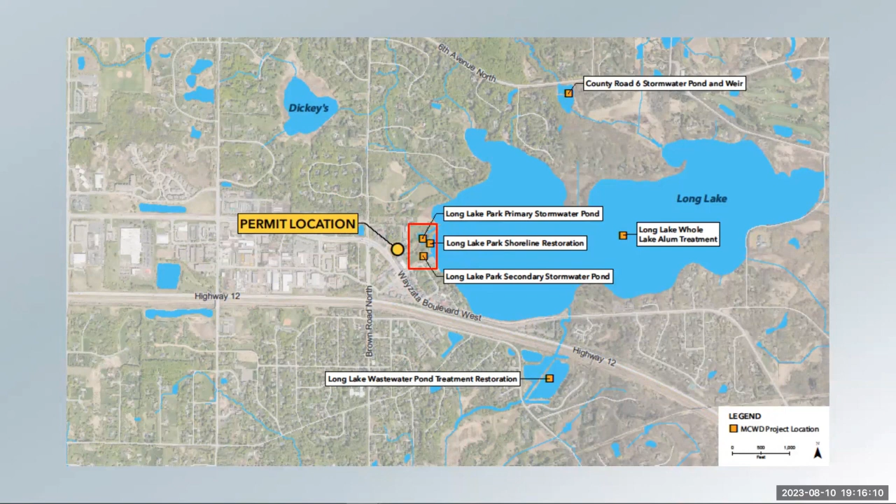This map shows a closer aerial view of the local area and how water moves through the channel that runs along the project site. Upstream of the project area is a drainage system or route along Highway 12. From this area, the water moves north under Highway 12, under Brown Road North, and under Wayzata Boulevard West through a system of culverts. From Wayzata Boulevard West, the channel runs through the project site and into the stormwater basin system before discharging into Long Lake.

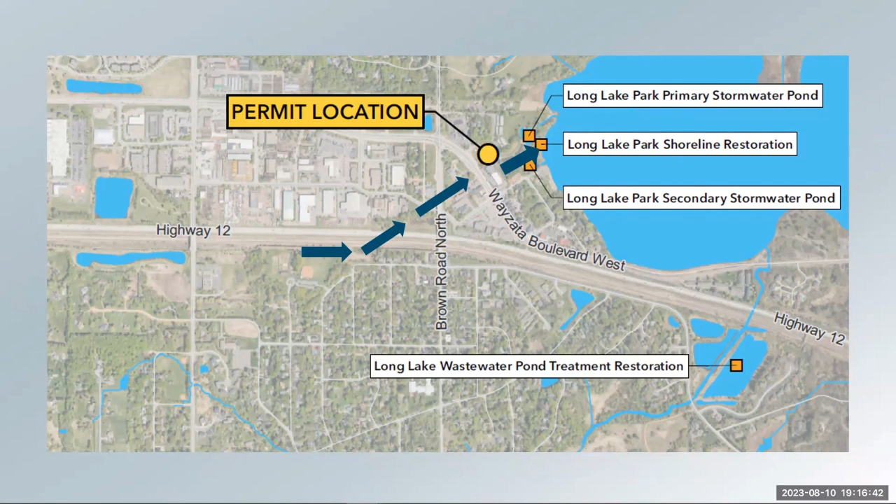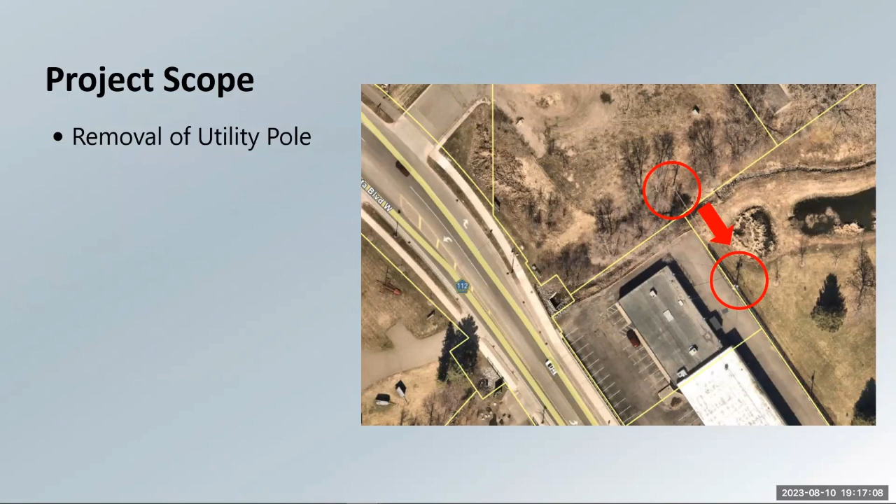The applicant was previously leasing a utility pole owned by Xcel Energy that has been removed. The existing internet fiber cable had been attached to Xcel Energy's pole and was connected aerially to the existing utility pole on the north side of the building at 1916 Wayzata Boulevard West. Because the utility pole was removed, the fiber cable is currently lying exposed on the ground and over the channel.

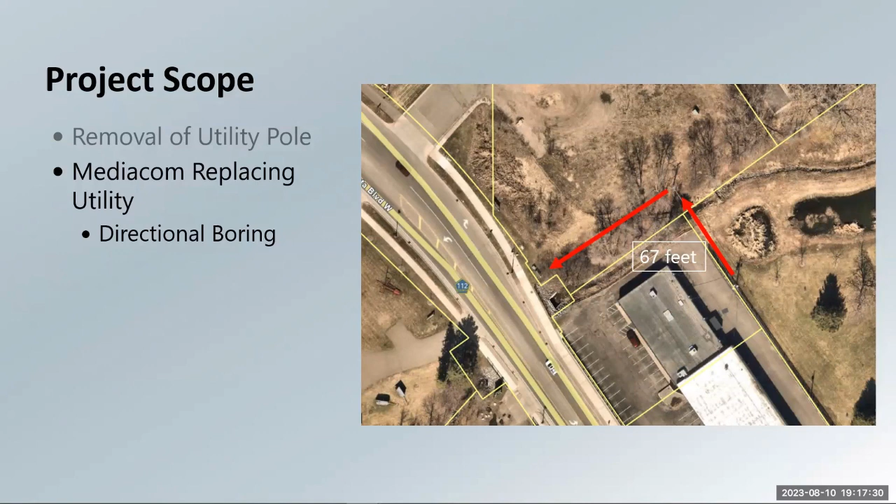Therefore, the applicant proposes to install 290 linear feet of 1.5-inch PVC interduct within the same utility easement using directional boring to replace the fiber cable that is currently lying on the ground. 67 feet of this duct will be located beneath the channel and will connect the fiber cable to the existing utility pole.

Now that we've looked at the project's location within the district and the proposed work at the site, I will review the district rules triggered and how the proposed project meets their requirements.

For the rule analysis, staff have reviewed the permit application and determined that the proposed project triggers the district's water body crossings and structures rule. The permit has been reviewed in accordance with the criterion of the rule.

The water body crossings and structures rule is applicable to projects that propose to place a road, utility, bridge, boardwalk, or associated structure in contact with the bed or bank of a water body. This includes horizontal or directional drilling and the installation or replacement of a pipe or culvert.

This project triggers the water body crossings and structures rule because a utility is to be installed underneath a channel with defined banks, thus meeting the definition of a district watercourse.

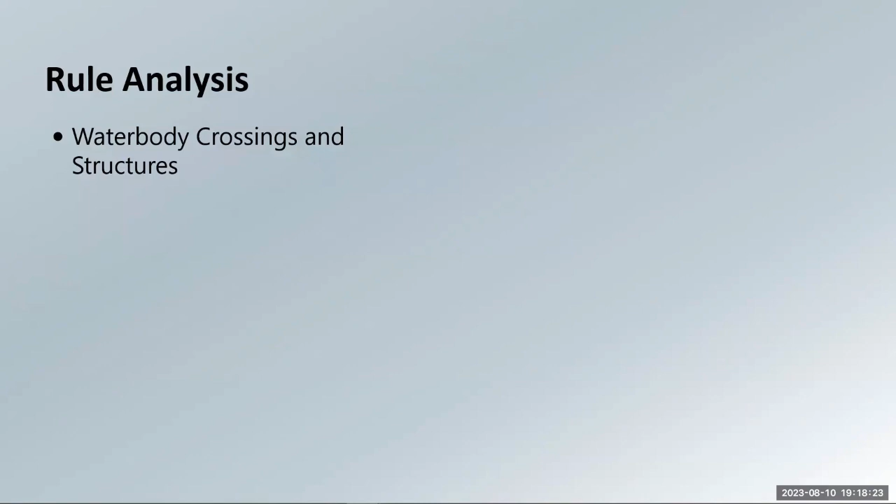The applicant's proposed work will not affect water quality, hydraulic capacity, or wildlife passage capabilities, as the applicant is not proposing to work within or disturb the bed or banks of the channel.

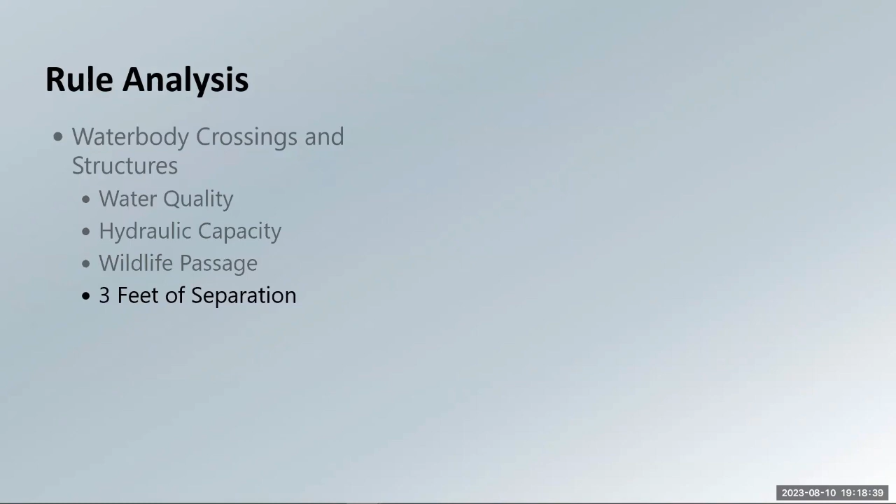The applicant has provided at least 3 feet of separation between the bottom of the channel bed and the top of the duct in their plans, and the applicant's proposed work meets the requirements and criteria of the water body crossings and structures rule, with the exception of one requirement, section 3G.

Based on review of the submitted plans, the applicant is not able to meet the required 100-foot setback from water bodies for one directional drilling bore pit.

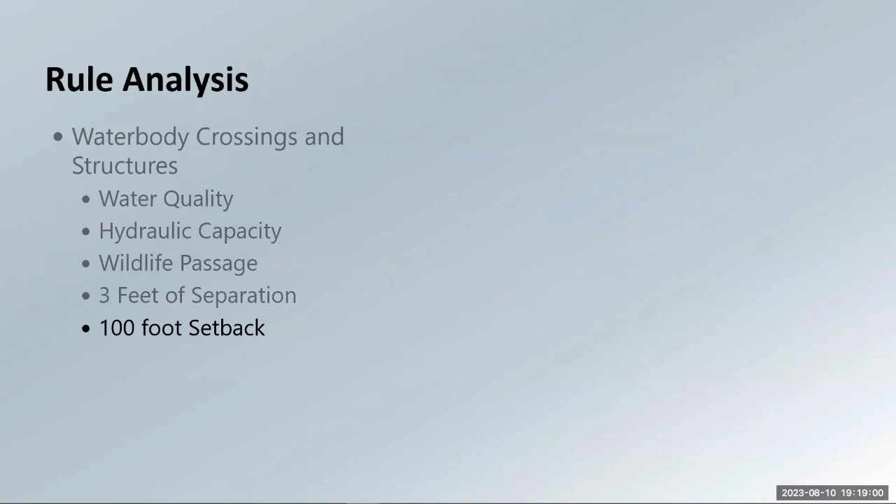The applicant has requested the board consider granting a variance to the water body crossings and structures rule, section 3G, which requires a minimum 100-foot setback from water bodies for directional drilling holes. The purpose of this requirement is to place bore pits far away from any watercourse banks to prevent erosion, sedimentation, and impact from the fluid used to route the directional drilling pipes, ducts, or lines.

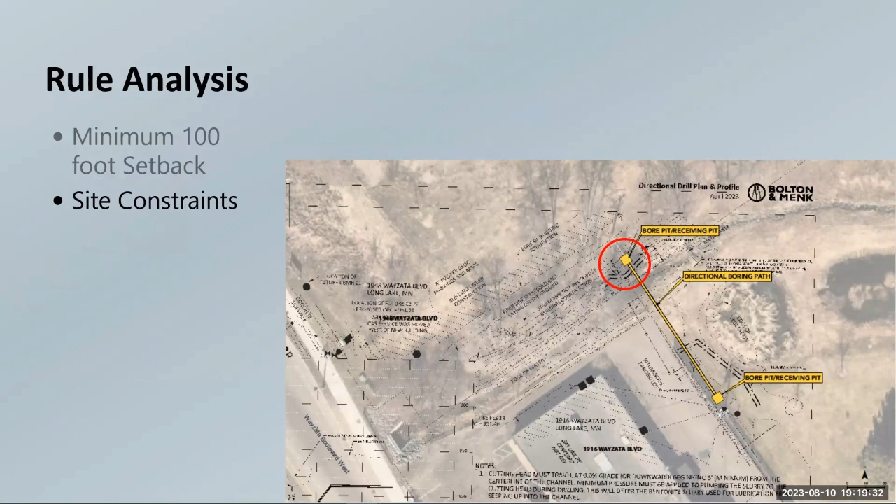The bore pit located west of the channel cannot be moved closer to the 100-foot setback requirement due to spatial constraints.

These constraints are due to existing utility infrastructure located on the property for the applicant, which are the existing handhole or at-grade vault located at Wayzata Boulevard West, here in the red circle, and the existing utility pole located north of the building at 1916 Wayzata Boulevard West, both of which the fiber cable needs to connect to.

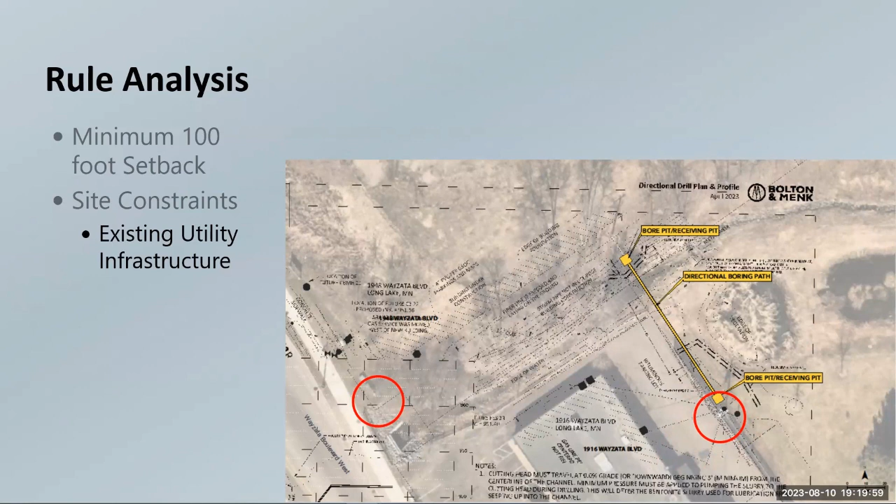The other site constraint is a senior living apartment building being constructed at the property of 1948 Wayzata Boulevard West. If you aren't aware of this, this is the Zvago Long Lake senior apartment building.

The applicant is proposing to install the fiber cable within existing utility easements, which will require a bore pit to be located 33 feet from the channel.

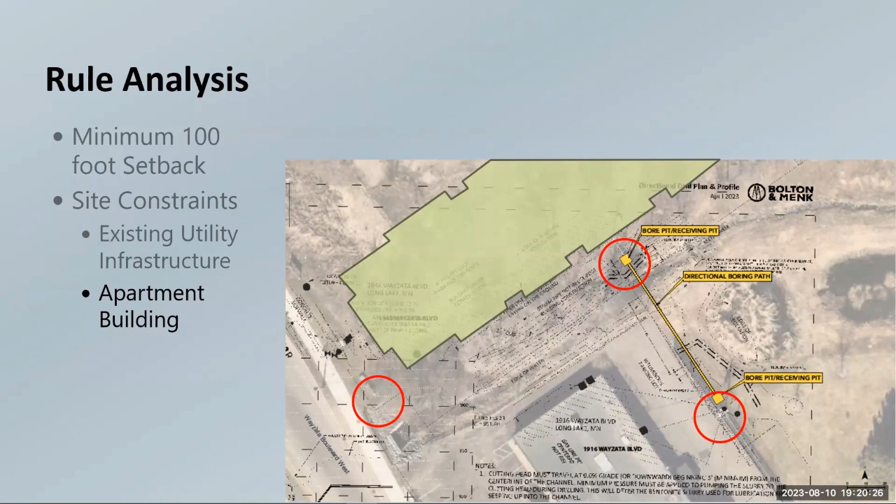The applicant has proposed to install redundant silt fence as erosion and sediment control measures to mitigate any risk of erosion or sediment movement from the proposed bore pit.

We've now reviewed the geography of the project area as well as the district rules that are triggered. In this next section of the presentation, I will be reviewing the applicant's variance request.

The variance and exceptions rule allows the Board of Managers to hear requests for variances from strict compliance with provisions of the district rules if the board determines that the request meets 5 criteria. Each variance criterion is analyzed in the following slides.

The first criterion asks the applicant to prove that due to special conditions inherent to the property, strict compliance with the rules results in hardship.

The applicant states that the position and alignment of the western proposed bore pit site represents a special condition, and moving the bore pit to the required 100-foot setback would cause undue hardship.

The fiber cable was previously connected aerially from the existing utility handhole or at-grade vault at Wayzata Boulevard, again located in this area, to the utility pole north of the building at 1916 Wayzata Boulevard West by an Xcel Energy owned utility pole located at the property of 1948 Wayzata Boulevard West, where this proposed bore pit is.

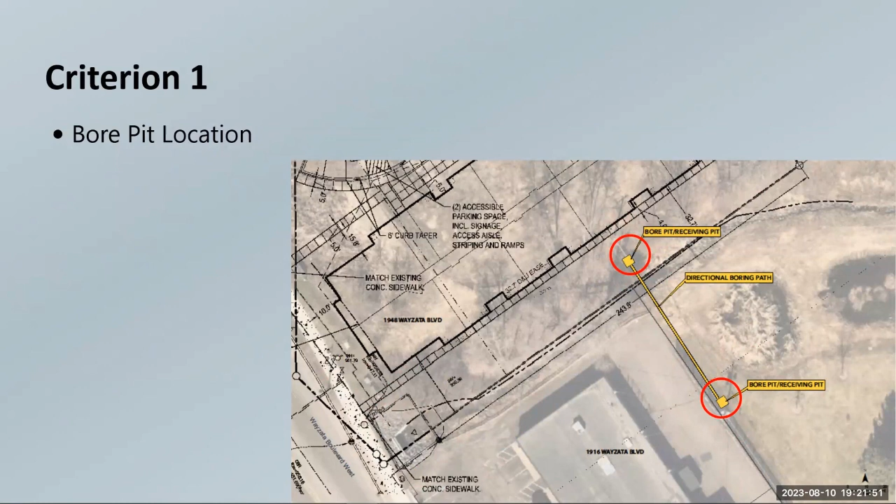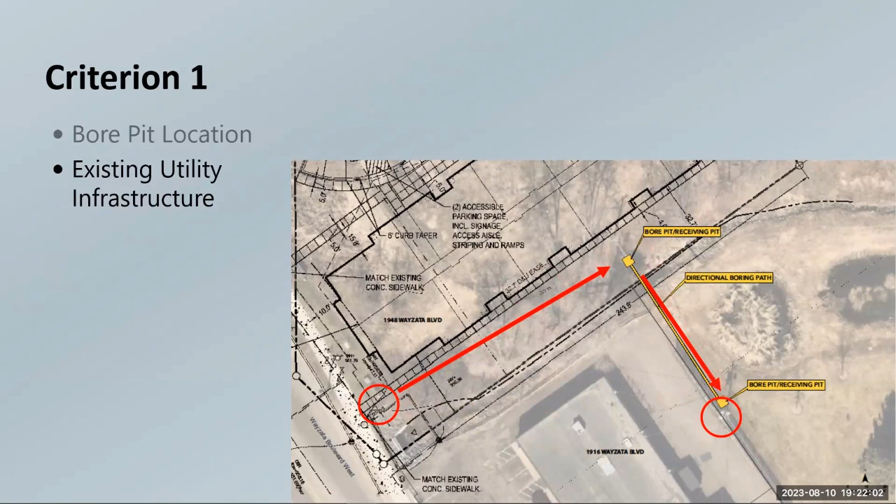A senior living apartment building is being constructed on the property of 1948 Wayzata Boulevard West. The building footprint restricts the distance of the proposed bore pit on the west side of the channel.

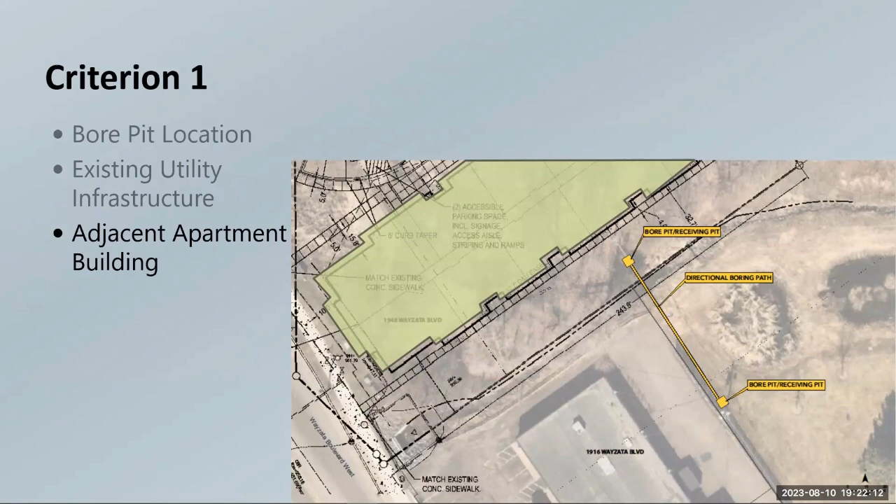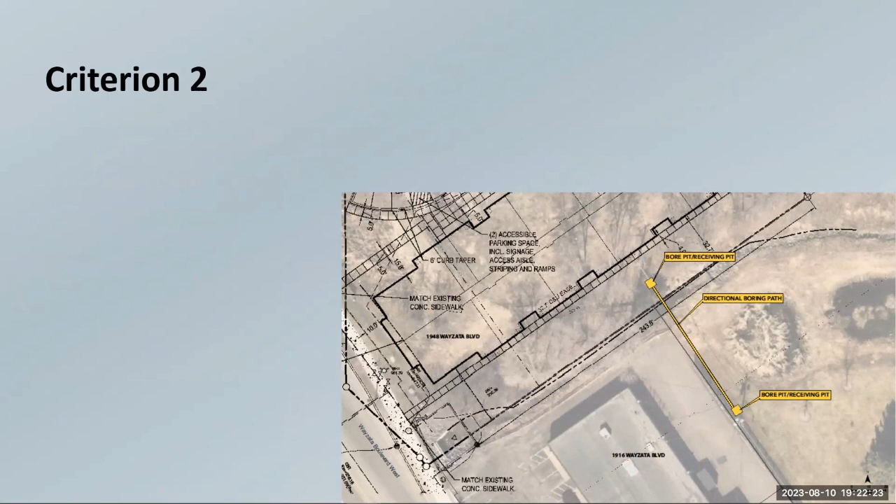The second criterion asks the applicant to prove that the hardship was not created by the landowner or applicant themselves. The applicant proposed to install the fiber cable underground because a utility pole they were leasing from Xcel Energy was removed. This removal was out of the applicant's control. The applicant is proposing to install the fiber cable using directional boring, with entrance and exit holes on either side of the channel.

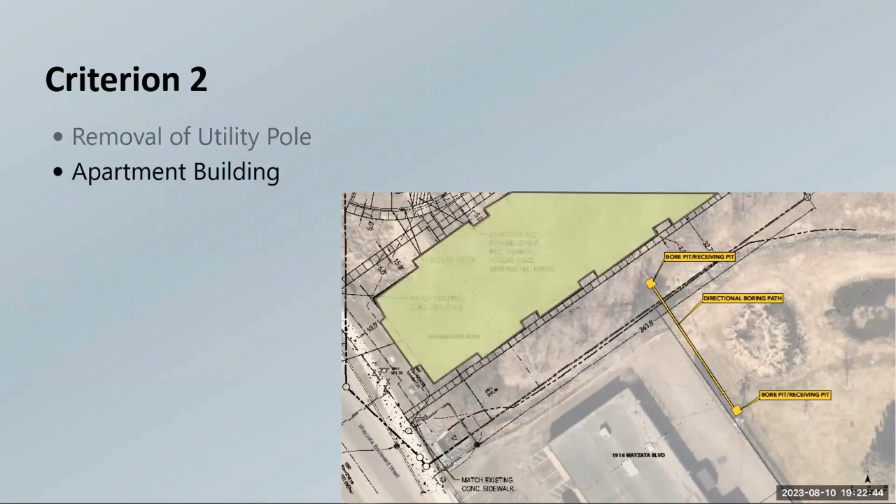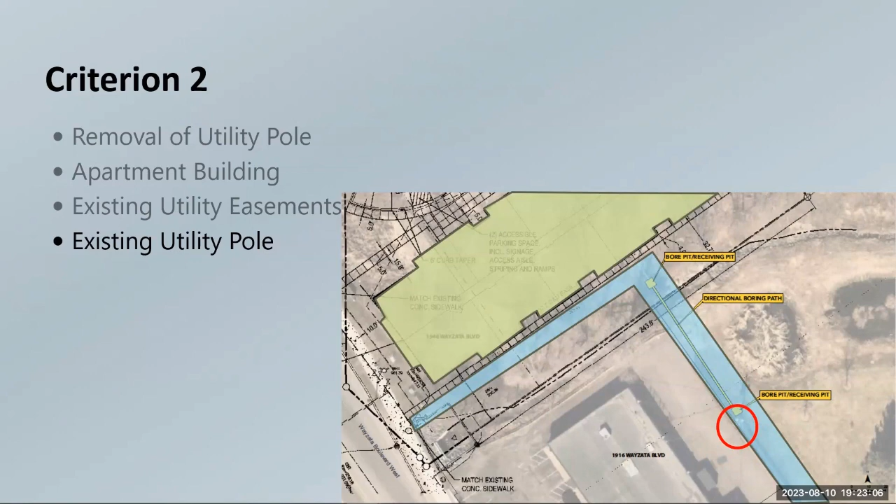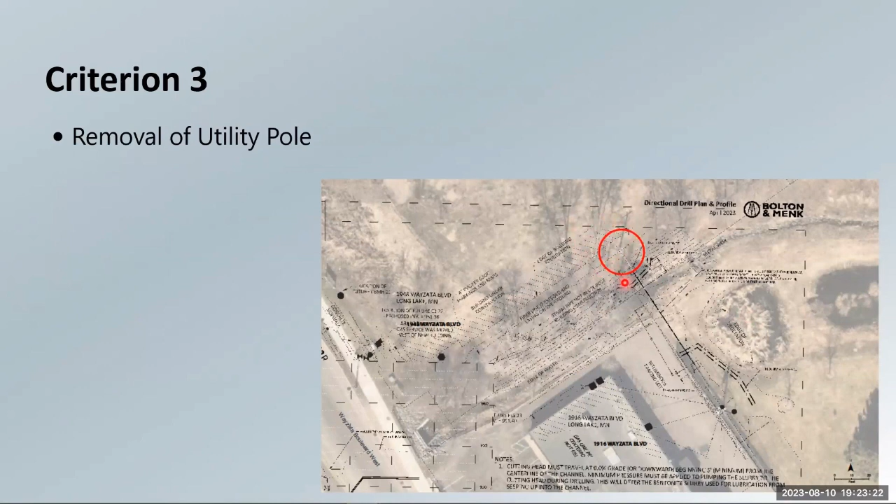The third criterion asks the applicant to prove that granting the variance will not just serve as a convenience to them and the project. Because a utility pole that the applicant was leasing was removed, the existing fiber cable is now laying on the ground and across the channel, from the existing handhole or at-grade vault to where the utility pole was located. The need to find a sustainable location for this utility is not merely a convenience to the applicant.

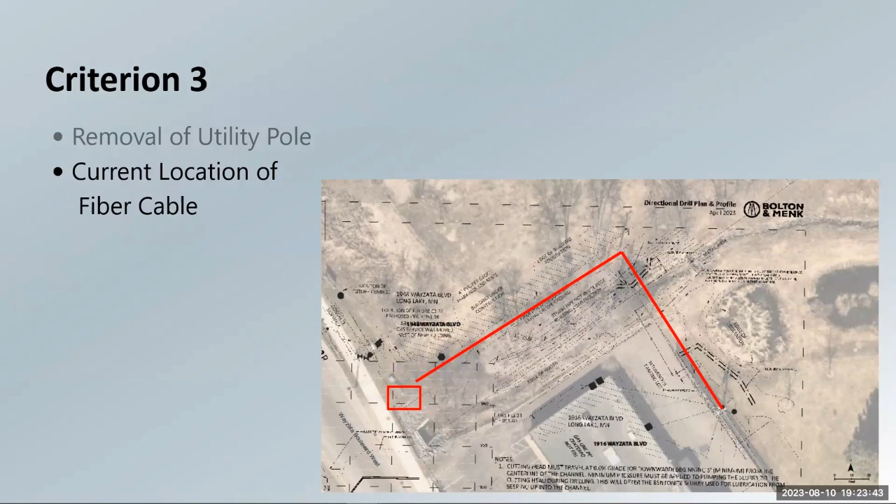The fourth criterion asks the applicant to prove that there is no feasible or prudent alternative to the activity requiring the variance. The applicant has explored alternative options for this location.

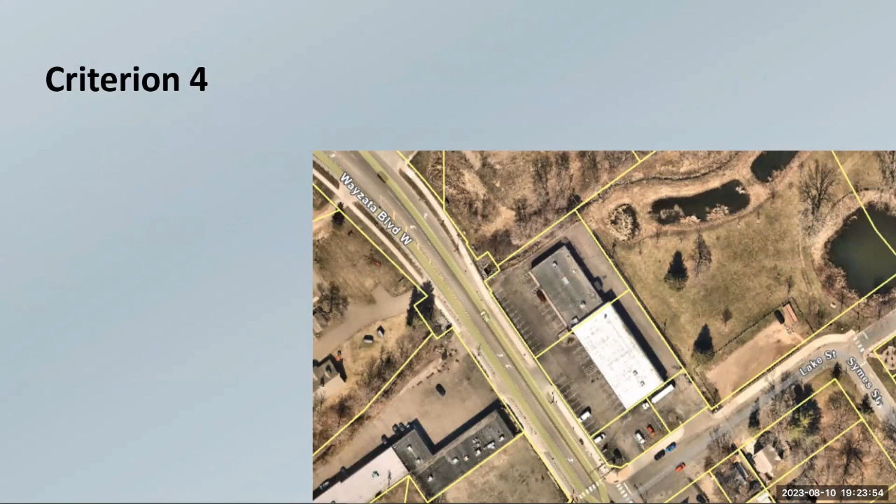The first alternative option is to construct a utility pole on the west side of the channel to have the fiber cable cross aerially. Constructing a utility pole would have potential channel impacts if the pole were to fall into the stream or become damaged, and would require ongoing future maintenance. In addition, utility poles require minimum setback distances from building structures.

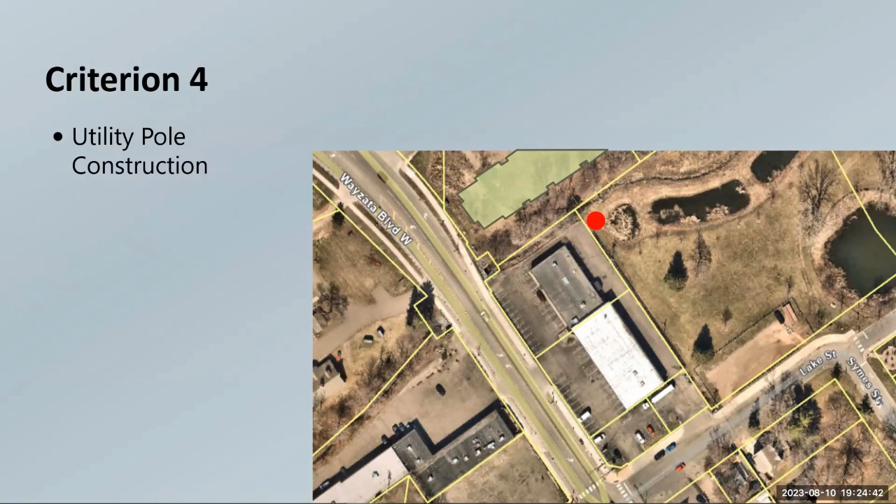To construct or install a utility pole on the west side of the channel within the existing utility easement that is set back far enough from the apartment building and not within the channel would place the pole on the east side of the channel. In addition, the applicant leases utility poles and does not put up their own structures. If an existing utility pole is an option, the applicant will pay a rental fee to lease the pole. If there are limited or no utility poles available, the applicant will install their infrastructure underground.

The second alternative is to leave the fiber cable at ground level crossing the stream. This would leave the cable at risk of being damaged or potentially falling into the channel.

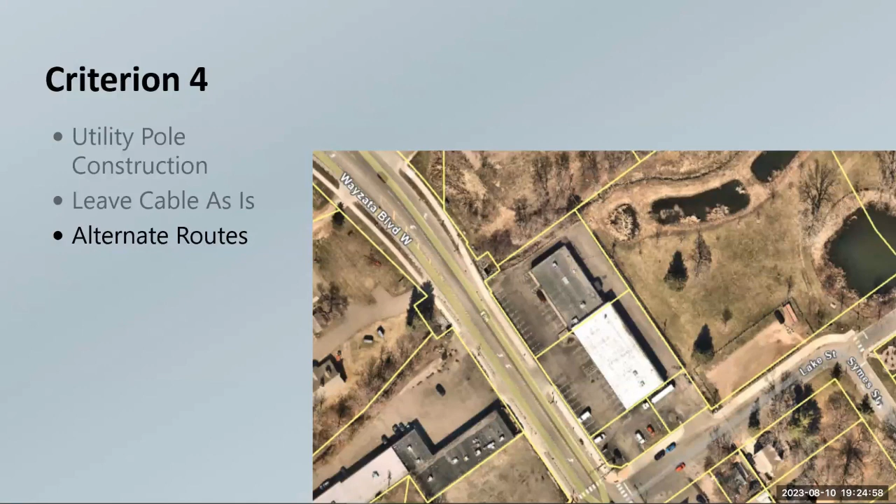The third alternative explored is to alternately route the fiber cable and tie it into the existing utility pole from the south side of the building while still avoiding crossing the channel. As shown in the alternative route maps included in the board packet, these routes would require additional linear feet of cable and excavation or work areas in order to route the cable and duct away from the channel and avoid crossing it while still connecting it to the south side of the building.

In addition, the applicant would need to avoid excavating within or along Wayzata Boulevard West, as it would be contrary to the special provisions condition listed on the applicant's right-of-way utility permit from Hennepin County. Because Wayzata Boulevard West was reconstructed within the last five years, no excavations or land disturbance are allowed within the roadway, curb and gutter, or sidewalk areas.

If the applicant were to route the fiber cable on the west and south side of the building, still within close proximity, the applicant would still need to cross the channel.

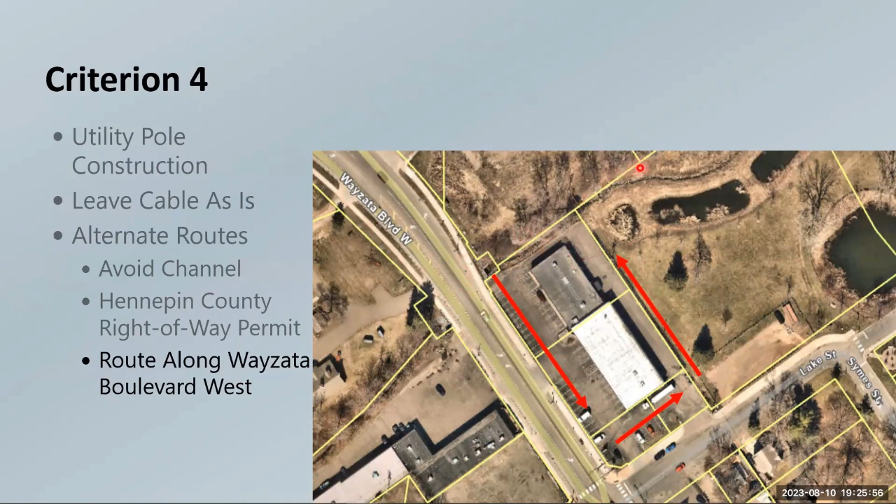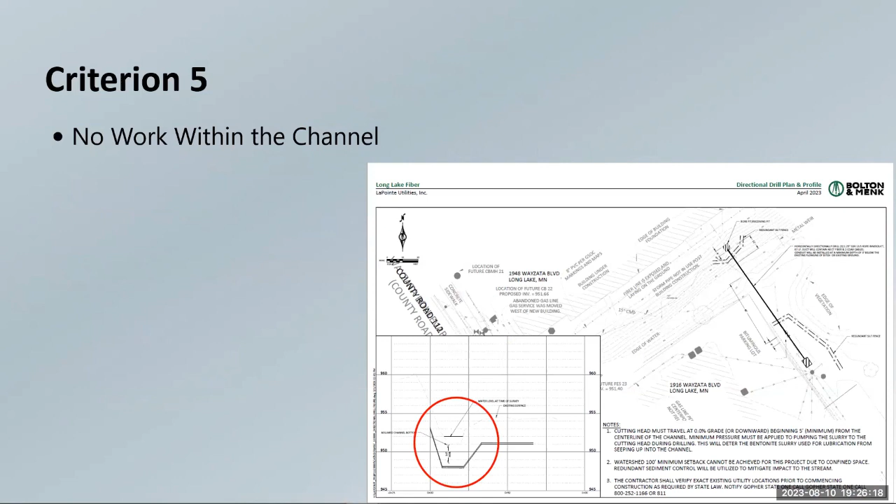The fifth criterion asks the applicant to prove that granting the variance will not be contrary to the intent of the water body crossings and structures rule. The applicant has cited that no work will be done within the bed or bank of the channel, and a clearance of 3 feet beneath the bed of the channel has been cited on the applicant's work plans. The ecological integrity of the channel will not change from existing to post-construction conditions.

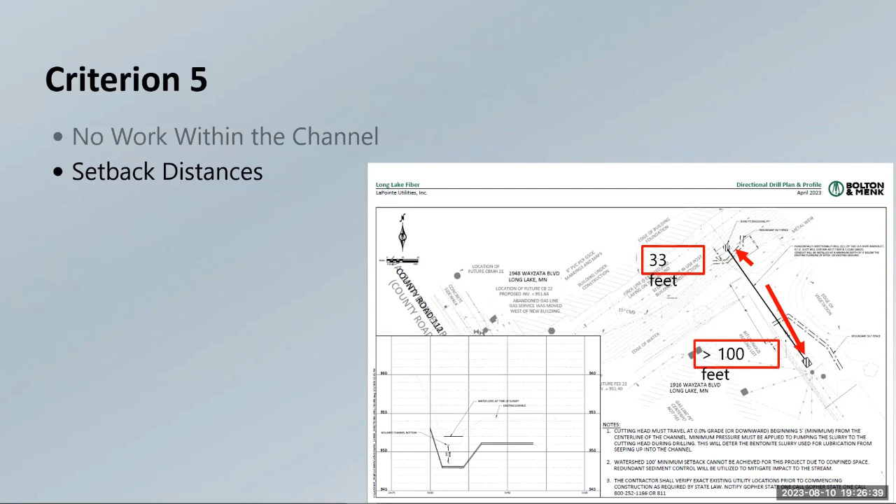Both bore pits will be set back from the channel top of bank. The proposed bore pit located east of the channel will be more than 100 feet from the channel banks, and the proposed bore pit located west of the channel will be approximately 33 feet from the channel top of bank. Neither bore pit will be placed within the bed or banks of the channel.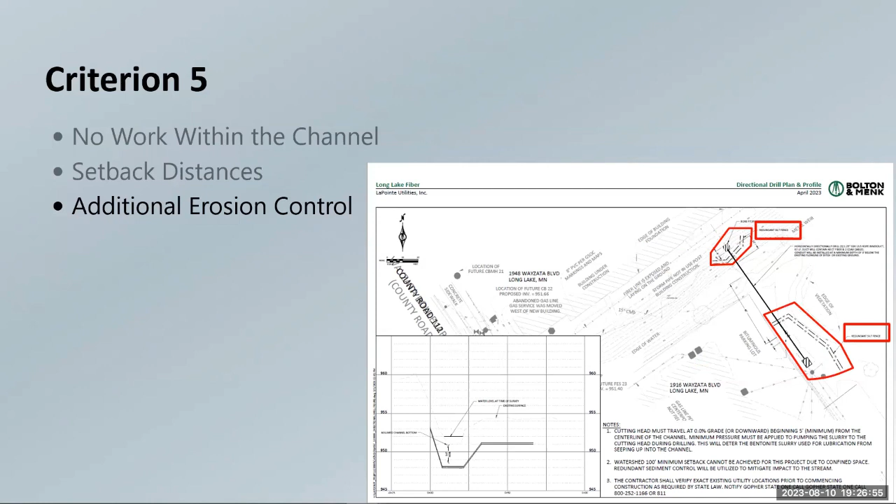Redundant silt fence has been sited on the applicant's work plans and will be used at both bore pit locations on either side of the channel. The use of multiple erosion control best management practices will minimize any construction impact to the channel and prevent any erosion or sediment movement at the bore pit locations.

In summary, the applicant has applied for Minnehaha Creek Watershed District permit for water body crossings and structures and a variance to provide a required minimum setback of 100 feet for one bore pit location. Staff is recommending approval contingent on the board's approval of the variance because staff found all other requirements to have been met. Staff finds the variance arguments to be sound, accurate, and justified, and on that basis, pass on the variance to the board for their judgment and review.

Thank you, Chair Olson and Board of Managers, for listening to this briefing on permit 23-71 and the applicant's variance request. If anyone has any questions or comments, I'm happy to answer them now. Before we do that, I'd like to know, is there a motion to approve permit 23-71?

Okay, well, how about it? All right, we'll have Manager Hijmati.

General practice is for the board to consider action on the variance first. I believe legal counsel is just confirming the same thing. So we will take a motion on the variance first from Manager Hijmati. Second by Manager Maxwell.

All right, any discussion on the variance? I had one question. You touched on it a little bit, but I understand Xcel took the utility pole down, but why not erect their own pole in the same spot?

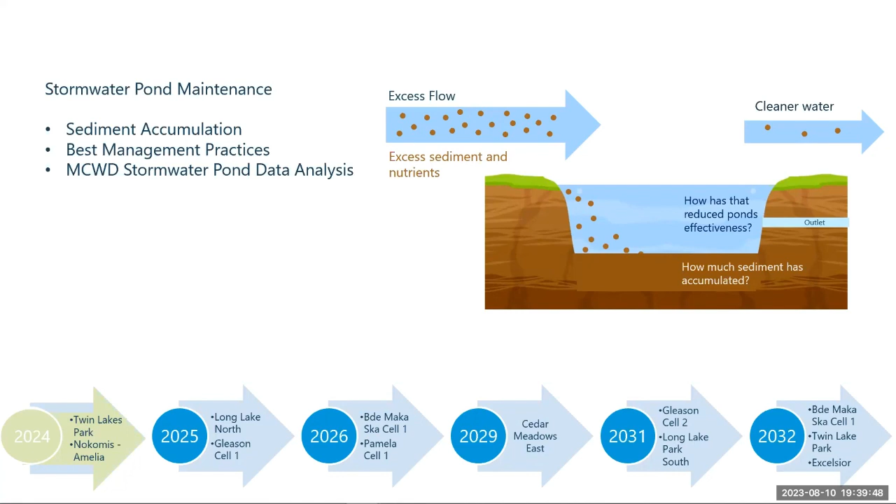This year we have 2 ponds that are requiring maintenance. See there on the bottom left, we have Twin Lakes Park and the Nokomis Amelia Pond. Again, familiar graphic: here we have the location of the ponds in the watershed, with Twin Lakes Park Pond at the top and the Nokomis Amelia Pond there in the bottom right corner of the screen with the red dots.

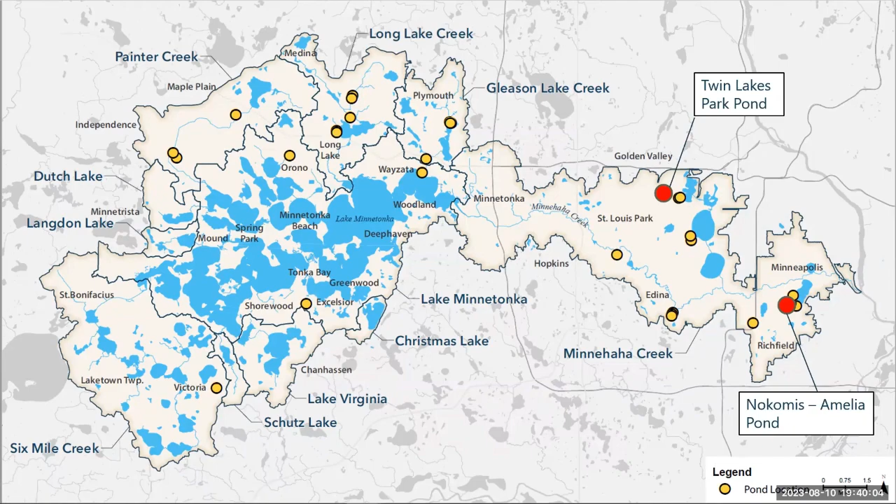So the timeline for the RFP: on June 6th at the board meeting, the board authorized the release of the RFP. That RFP was open for submittals from July 7th to the 28th. The district received proposals from 3 firms, Geosyntec Consultants, Moore Engineering Incorporated, and Stantec Consulting, and the board received copies of each of those proposals in a separate email.

The process we used for review: we reviewed 3 areas of methodology, experience, and cost. We looked at the firm's understanding of the project, the completeness and specificity of their proposal, any innovation or creativity placed in the proposal, the experience of the company and staff in terms of doing this type of work, and then the project scoping and cost effectiveness.

Our staff recommendation is to authorize awarding a contract to Stantec Consulting. The determinations we used for this was that Stantec demonstrated a high level of technical and scientific expertise through a concise and well-written proposal with detailed knowledge of the site-specific challenges. Their proposal dedicated the most hours to the area of greatest risk, and their proposal had the most overall project hours while remaining the least costly proposal.